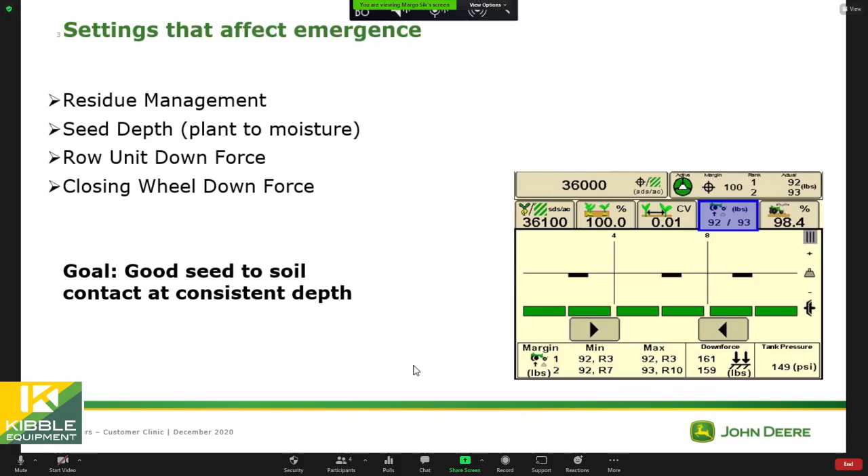But when you're doing all these other upgrades, it's kind of like when you're remodeling a kitchen, right? You don't just do one thing. So we're going to talk about these options today and these settings, what we can do in the field to adjust for the best possible outcome. You may or may not have all the options that we go through today, but there's something on your planter that does affect it, right? So with that, we're going to get started.

Before I move to the simulator, I just wanted to take a quick review of downforce, because every year we get lots of phone calls and questions on downforce. How much do I use? How do I adjust it? We're looking at some options here on the screen that are late model equipment. What we're calling out here is if you've got features like row cleaners or closing wheels, whether they're the easy adjust row cleaner or a manual adjust row cleaner or closing wheel, get your depth determined and those set up before we start dialing in a bunch of downforce adjustments, because one will affect the other.

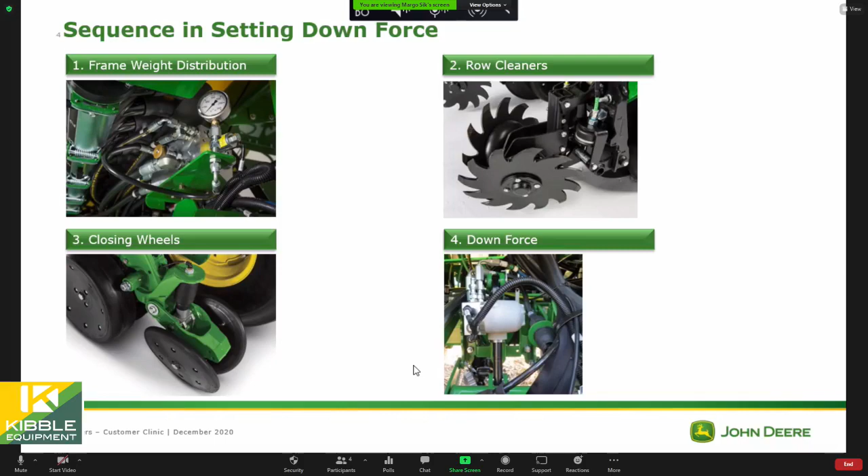And this is just a sequence of how we want to make sure things are set up. So if you do have the frame weight distribution feature, get that dialed into where we want to start. Get your row cleaner set where you think it's going to need to be, your closing wheel set where you think you're going to need to go. And then we always start with a little bit of downforce in the system, and then we adjust from that when we go to the field.

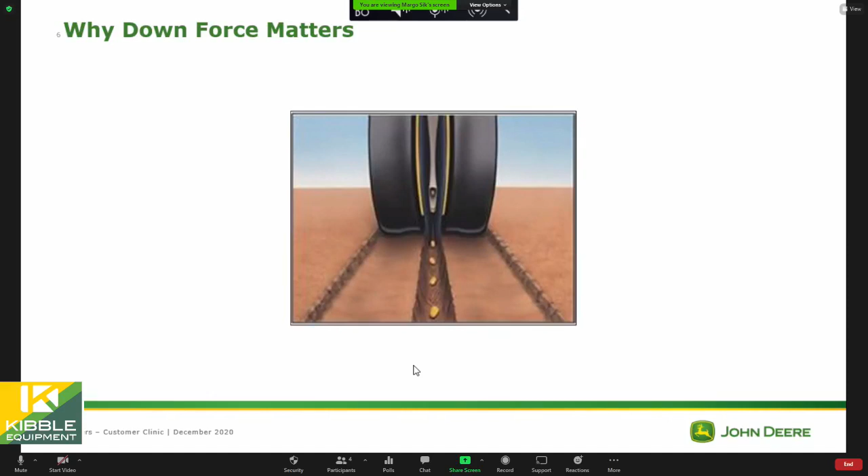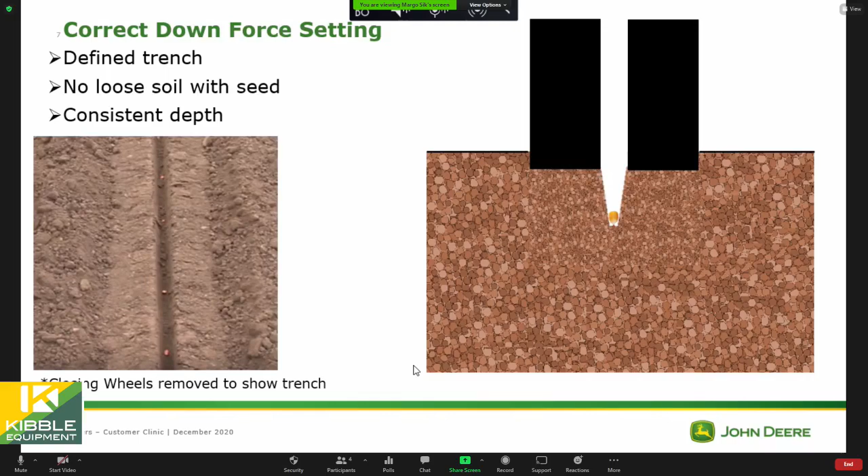So when we go to the field and we talk about downforce, we've talked about why it matters. We're talking about making sure we have a defined seed trench that allows us to drop that seed straight to the bottom, so there are no inconsistencies with depth, right? Something that's too loose could cause issues with placement and depth. So this is a good seed trench example.

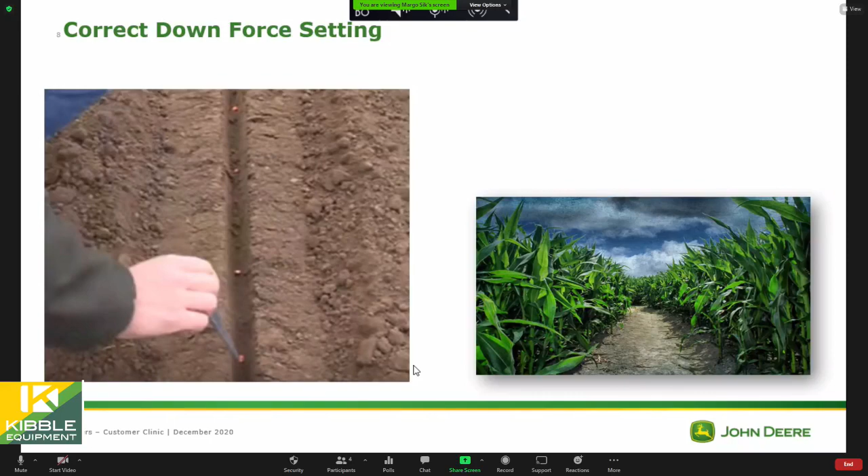The closing wheels are obviously tied up in this picture, and you can visualize your spacing when you're doing a field check, and each seed is at the bottom of the trench. And, of course, if we don't have enough downforce and that is not set appropriately, we get caving of sidewalls, and you can get this situation here where we have seeds that are not going to emerge at the same time.

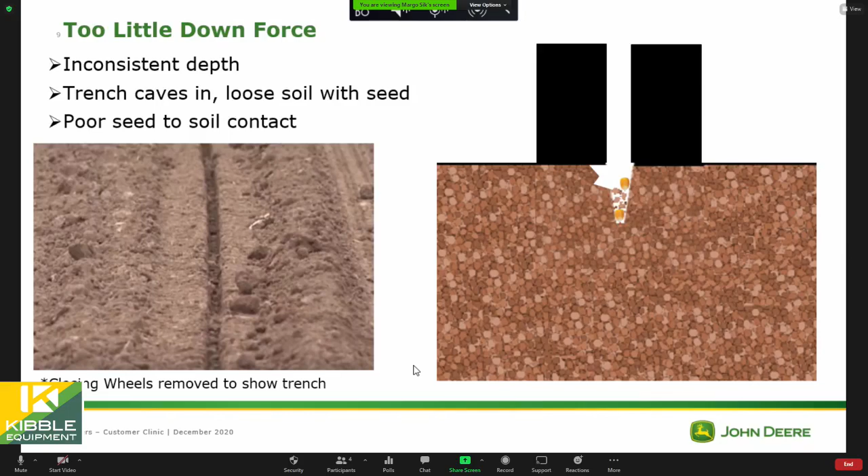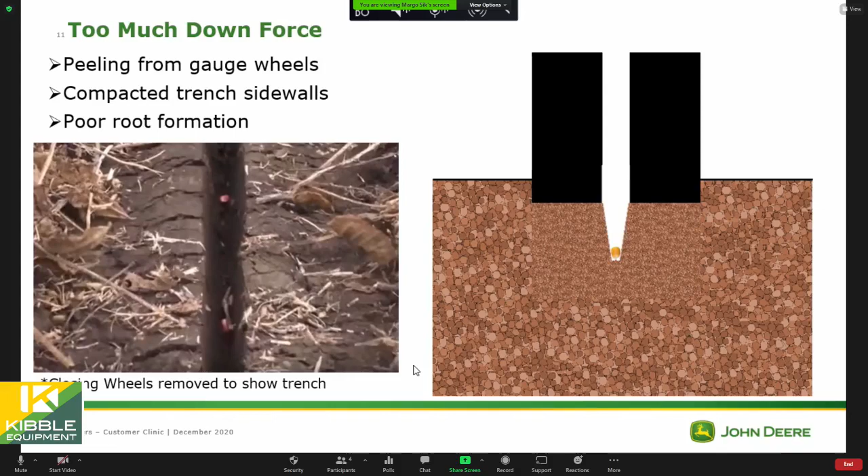And of course, the opposite would be too much downforce. When we start putting too much down and we start having compaction of those sidewalls, we're going to have poor plant health, poor root formation in those early stages, which may affect it later on as well. So just wanted to get ourselves dialed in on what too much or too little looks like.

So when we're watching our monitor and making adjustments in the cab, we're moving things the right direction. So adjustments in the cab. And we discussed downforce, and we have sensors on our row units. When you move into an IRHD, individual row hydraulic downforce system, there is actually a downforce sensor on every row, on every gauge wheel stop.

If you're using active pneumatic, so you're using the airbags that are adjusting, you have maybe 5 sensors across your machine, and it's looking at those and it's making adjustments on the go for downforce for the whole planter frame. But the rules are all kind of the same. That sensor is actually measuring what we call margin. Okay, and we get a lot of questions. Well, what does this number need to be, and what does it really mean?

So when you think of downforce, that's the pressure that we're putting on with either the hydraulic downforce system or the airbag system, or heavy duty springs do the same thing. They apply downforce. Okay, of course you have the weight of the row unit. So together, those may be applying 300 pounds of force. Okay. Now there's force being pushed, as you lay a row unit down on the ground and you pull it through the field, there's resistance from the ground and the soil, right?

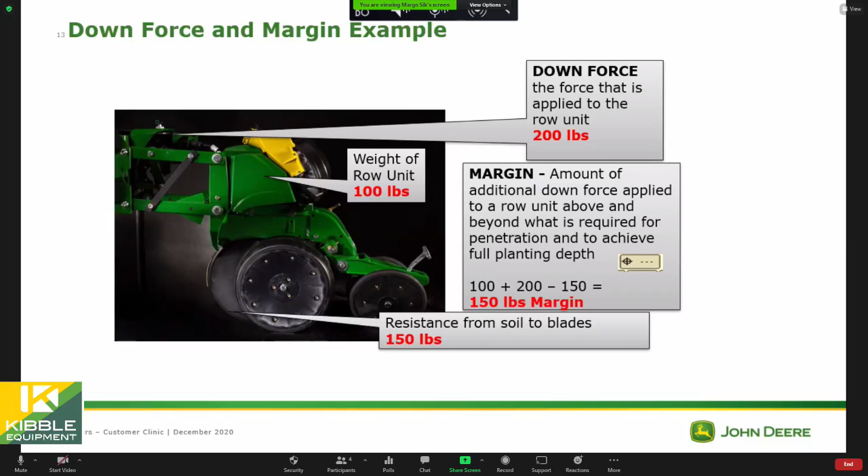So there's 2 modes, whether you're using individual row hydraulic downforce or active pneumatic. There's a set point mode and an active mode. And it's very important to know when you're in which one. And we'll talk about that when we get to the simulator. But in set point mode, you are not active. You are not moving on the go. You've told the system, I just need 200 pounds of downforce. I know that gets the job done and I just want to keep it there. It's not reacting to field conditions.

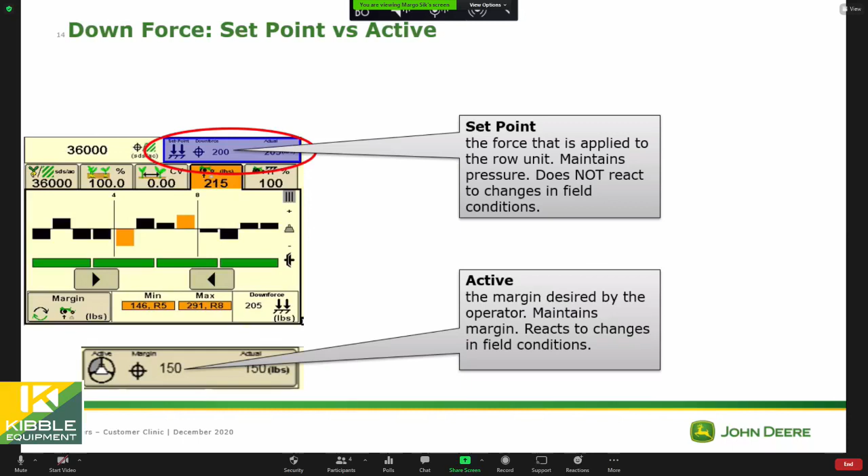In active mode, it should be taking that margin reading and actively changing the pounds of force needed to maintain that margin when we're operating in the field. So just wanted to get through these slides and kind of review that before I jumped over to the simulator. So with that, I am going to, pretty sure, oh, I lied. I have one thing I can't show you in the simulator. So we're going to talk a little bit about unfolding planters.

If you've got a newer SeedStar 4 planter, something that you've had delivered on the farm in the last probably 3 to 4 years, we no longer ship these planters with a frame control box. They are all controlled for fold and unfold through the monitor. There's an app inside the SeedStar app that allows for frame control. So you're either in transport mode for folding and unfolding, just like you had the switch on your frame control box, or you are going to be in plant mode when you want to raise, lower, and plant and activate your markers. So that's what we're looking at here, the toggle between transport and planting mode.

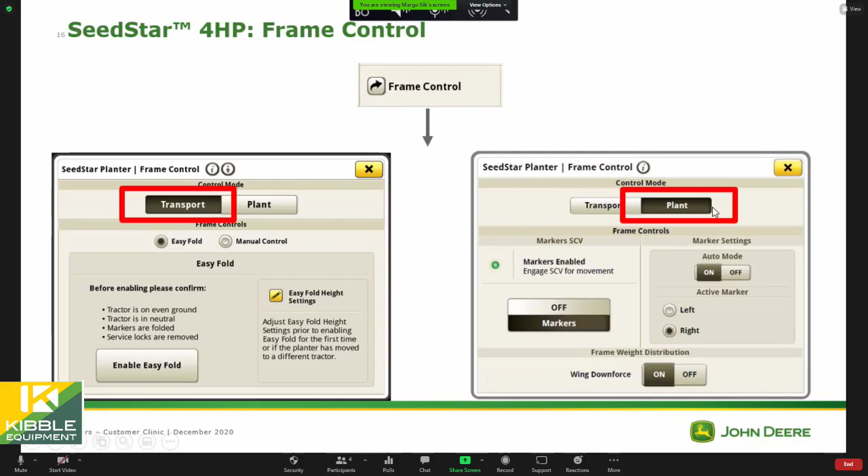And then, of course, if you have this feature, we have something called Easy Fold. So you can toggle to transport mode and unfold your planter manually. So this basically becomes your switch box on the screen. You press what you want to do first. If you're folding, you might want to raise up your hitch for your folding height, and then bring your wings in, those sort of things. Or Easy Fold pretty much automates the whole process with one SCV press.

So to set that up, you have to go inside these Easy Fold settings and first calibrate your hitch position for a 1775 planter. And that's basically where it's going to be for all the way up for transport, where you want to have the hitch position for planting. And then usually for folding, we put it somewhere in the middle where you know that the latches on the wings will clear the hitch.

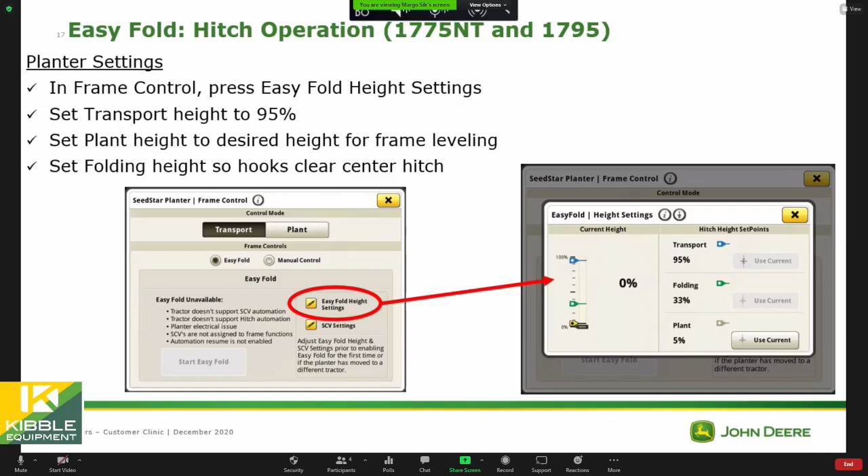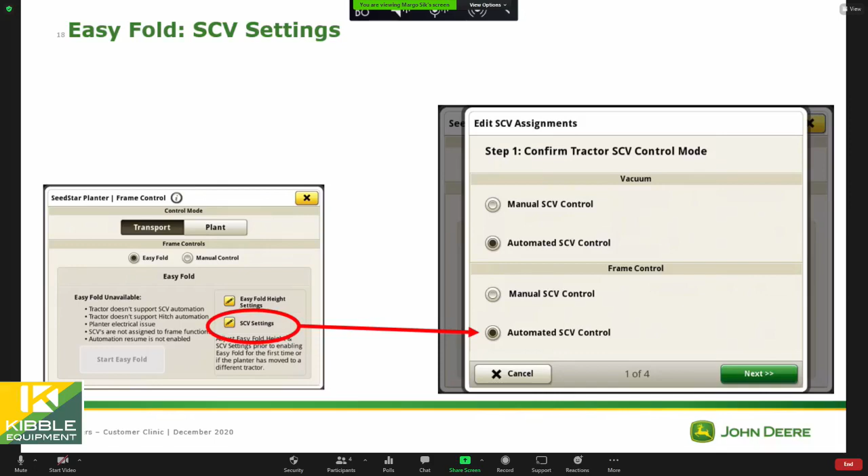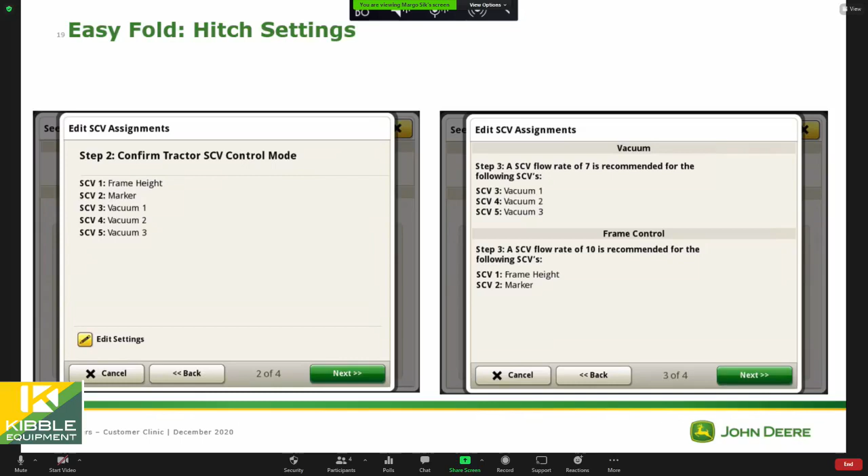And then we also need to go inside the SCV settings on this screen and automate it, toggle the automated option there, and then tell the tractor how the machine is plumbed for your frame and your markers, as well as the vacuums. So these SCV assignments also will affect a feature called vacuum automation for us. And we'll talk about that here in a couple more slides.

So anyway, now that we got it all set up, which our shops will be setting this up before they deliver them to you, but wanted to review that just in case you got a different tractor and needed to set that up. But once we are ready to unfold, in the easy fold option here, if everything is enabled, we should be able to hit enable easy fold. So it gives you even a checklist of what you have to do to fold or unfold.

We also note that to enable the whole system, kind of like with AutoTrack, you have to hit your resume switch for your AutoTrack to enable the whole process. So once that is enabled, we should be green, good to go, and hit this enable easy fold option and then activate your SCV. SCV1 is your automatic SCV in this example, and you just hold that until it folds or unfolds, and it will do all the things it needs to do, whether it's raise, lower wing wheel, bring in wings, or lower a hitch down. It'll do it in the right sequence and order of things.

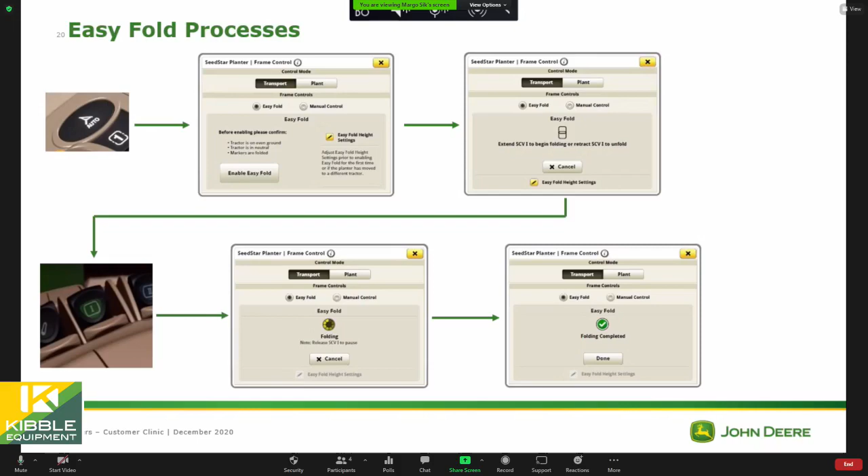As it's folding or unfolding, you'll get the little spinning circle, and when it's done, it'll show you that it's complete. So it really has automated that and made it nice and simple and easy for us. Yeah, but do not go to detent, right? Yeah, so that leads me to my next slide. If you click it into detent, this message over here says it's paused.

So when we're operating easy fold in this auto mode, you just hold either the extend or the retract, whichever way you're going, in that position to activate the easy fold, for lack of better words. And then if you let go, it'll pause. If you push it into detent, it will pause, and you'll have to bring it back to neutral and then reactivate it.

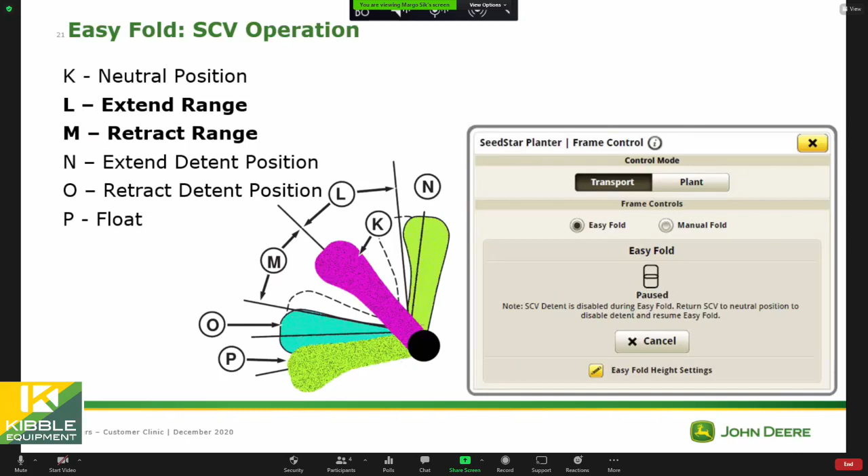Talked about vacuum automation briefly. So this is a SeedStar 3 screen, but the concept is the same. So when you're assigning the SCVs, we also assigned what SCVs were plumbed to the vacuum. And during that process, instead of worrying about how much flow I need to put on each of my hydraulic valves to take care of each of these hydraulic vacuum motors on the fans, I can just say, hey, I know for my seed size today that I need to have a target. In this example, we have a target of 11 inches of water for vacuum. Then it will determine how much flow it needs to do that.

So if it's a little bit more in the morning because it's cold and the oil's a little colder, or if it's a little warmer in the afternoon, it will adjust accordingly and just maintain that target vacuum pressure that we're after. So a really nice feature of moving into an electric drive planter with that vacuum automation. That's something available on both 5Es and ExactEmerges.

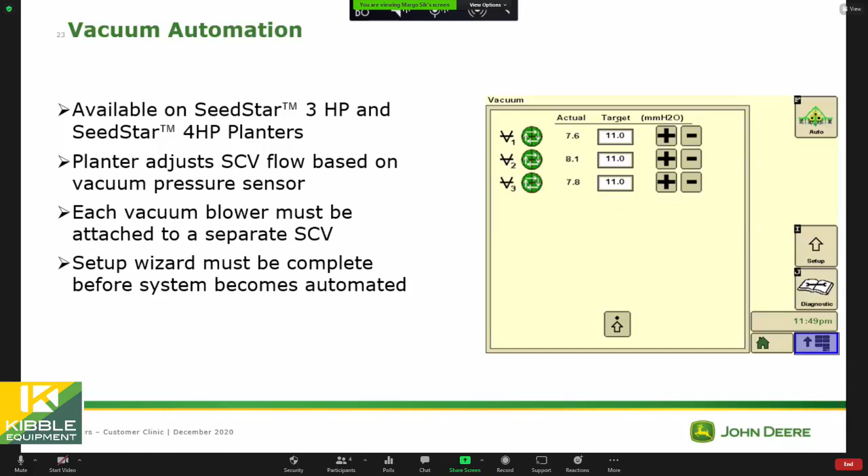So that leads me to setup. I've got a little checklist here. I kind of stole it from our Equipment Plus app. The same checklist is in there. We'll talk about the app at the end of our session today. But when you get yourself to the field, what's the order of things to make this thing happen, right? So you'll use transport to fold and unfold. And then you'll have to switch to plant mode so you can raise, lower, and operate your markers.

And then with electric planters, we have to engage our PTO power generation by turning on the PTO. And then there'll be a button on our screen to turn on the EPG. That's our electric power generation, actually on the planter side of things. So that engages everything from a power perspective. Then we'll make sure our hydraulics are enabled and turned on to continuous detent for all of our vacuum fans. And then we'll lower our planter, because when we lower our planter, we have that on detent, continuous flow on the lower side to operate our CCS fan.

So we've filled up our CCS tanks with seed. We're ready to go. We incorporated our talc while we were filling. Now we're ready to prime the mini hoppers down on the row unit. So lowering that planter will pressurize that tank, push that seed down to those mini hoppers, get those full. Now that they're full, I'm going to ask you then to raise the planter back up.

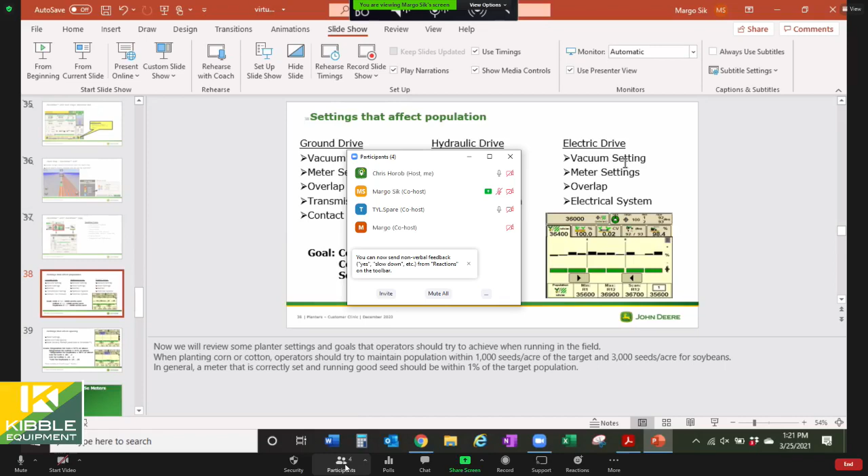Perfect. Okay, so now I've jumped over to my screen with our simulator on it, and now we're looking at a SeedStar 4 monitor and a command arm for a tractor. We're going to basically walk through that checklist now on the monitor, like we're in the cab getting ready to plant, because I want to make this planter plant so we can look at this monitor work and walk through everything we can do from the cab when it comes to monitoring our planting operation.

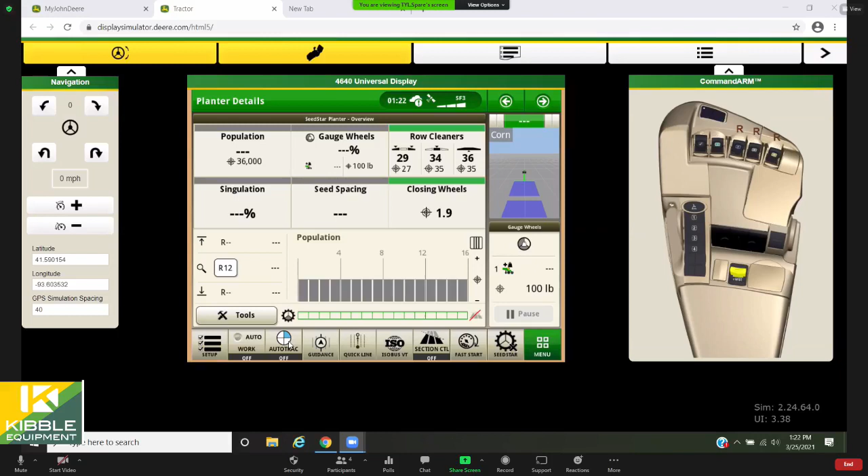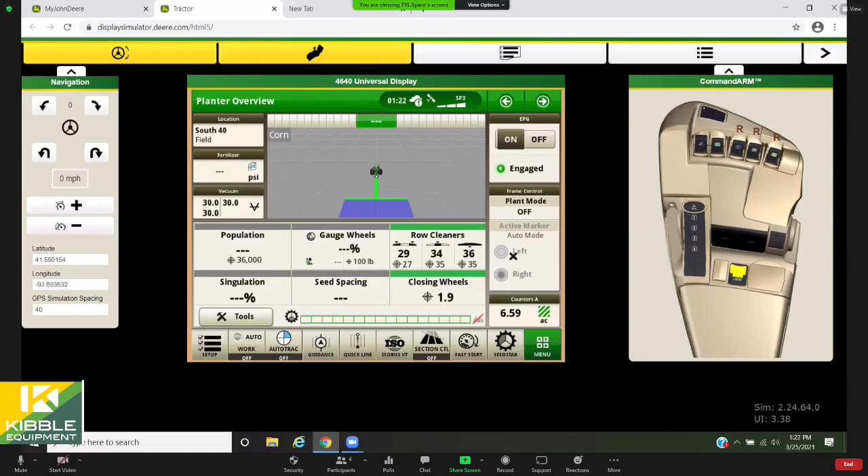All right, so with that being said, I'm going to navigate to the planter overview screen, and I've unfolded the planter. I actually have my hydraulics engaged for my vacuum motors here. I am going to turn on my PTO, then turn on my EPG, and I've got my planter currently in the raise position.

And if I hit that SeedStar hotkey on my shortcut bar, this is where I find that meter brush fill button. So I can hit this fill button and that will rotate the meters while the planter is raised until I press that a couple times until you see the system is all primed up.

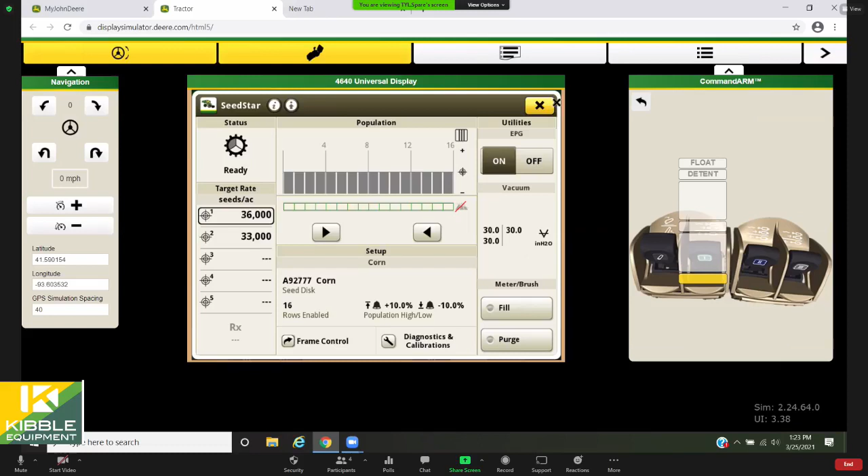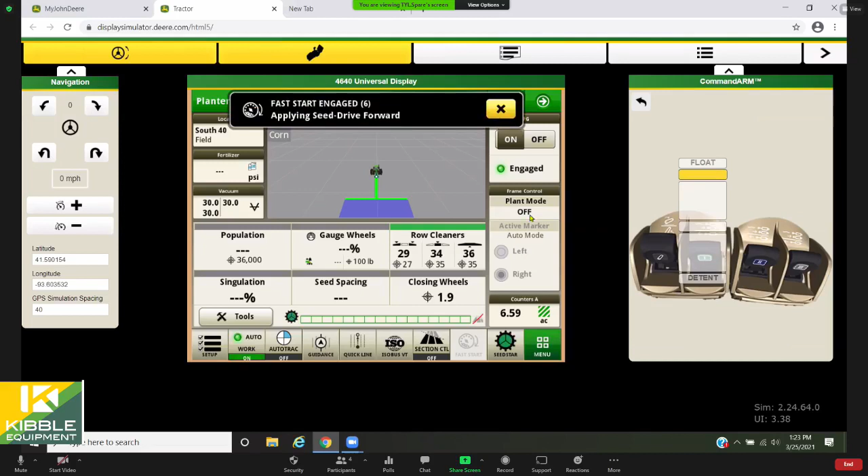But now I'm going to go ahead and lower the planter down to planting position, and I have vacuum pressure here, you see. Then I'm going to ask my tractor to drive forward. My planter has been sitting for a few minutes here, so we'll get her going.

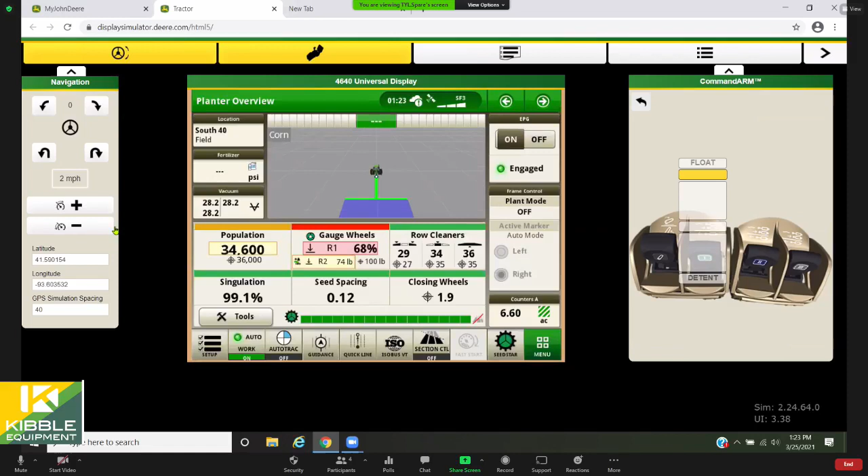So now I'm planting, indicated by the coverage map here, and of course I'm getting some monitors down below on this overview screen. Any monitor that's in the green usually means it's really close to target. Any monitor highlighted in orange would be a little away from that target. And then if it's red, it needs attention, right? We need to make an adjustment, take a look at something.

So this is the overview screen. This is a nice page to look at, kind of just driving through the field, because you do get that coverage map, and you've got the basics of the planter down below.

But if you really want to dive into the details, I'm going to page over to my planter details screen, and this gives me more of a full picture of the planter. And of course I got my layout laid out over here, so I can still see my coverage map and upcoming boundaries or flags, those sort of things in the field.

We have several monitors inside one, right? We've got population, singulation, spacing, we have downforce monitoring. And then of course, if you take the option on your planter for the row cleaners with the easy adjust row cleaners or the pneumatic closing wheels, you'll have those controls up here too.

So no matter what we press up here on the top, you're always going to have your population monitor at the bottom. Nothing's changed here. Your center line is designated as your target. Bars above or below the line mean you're either seeding slightly higher or slightly lower than target.

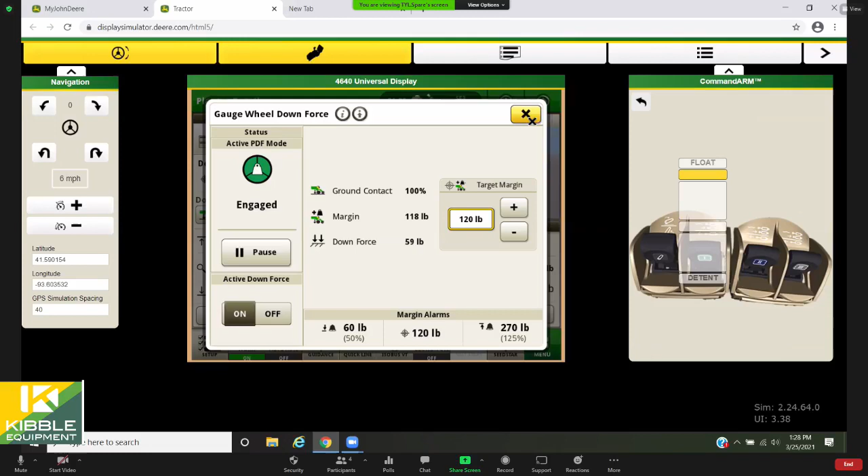And we are in active mode, so we talked about set point active, that's on. Just give it a little bit more margin - we think we need more, so it might make this change in 20-pound increments, which is the default here. Increase that margin, go ahead and plant another little ways and give the system time to react.

And do another field check. So in general, if your seed trench is loose and not adequate, use a little bit more margin until you get there. If you have way too much, use a little bit less. And of course, as you see here, I made a little bit of a change, so it's using more downforce now to achieve that margin, which makes sense.

What we're looking at up here: target, actual margin, and then what rows are high, what rows are low. And of course, because it's individual row downforce, these guys are all kind of interacting independently. You could also, if you wanted to watch a specific row inside any of these monitors, zoom into the details - if I just want to watch these four rows a little bit closer, maybe the ones in the center of the planter, or closer to wheel tracks, whatever it may be.

Or if you want to dial into a specific row, you can click on just row 6 and see what's happening with all aspects of row 6 - population, spacing, singulation, all of the above, downforce.

Anytime you dive all the way down into an individual row, you can get back to the overview by hitting the tab at the top, and that brings you back to the overview, the planter-at-a-glance screen, as we'd call it. So that is kind of the ins and outs of the downforce.

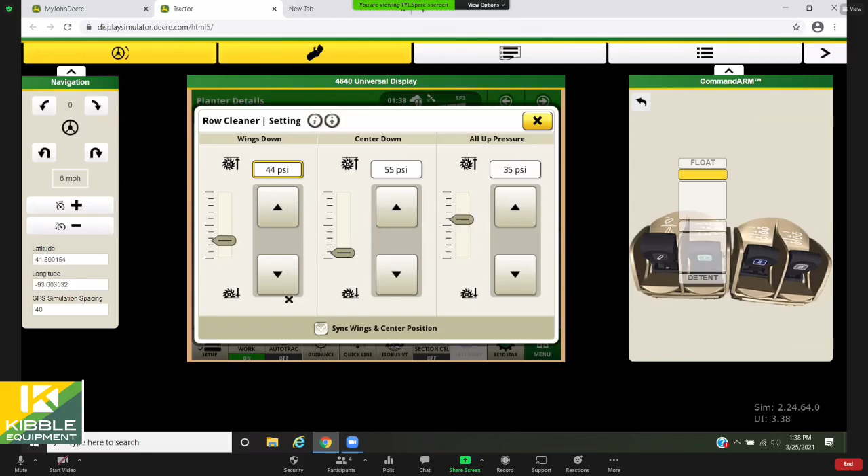But just a reminder that number 3 setting, row cleaners are not supposed to be a primary tillage tool, right, Margot? That's right. So maybe we might want to talk about that, right?

So when we field start you guys, when you buy a new planter or when you're out taking a look at it, row cleaners have an important responsibility, and it's the last chance for residue management. Row cleaners affect emergence by making sure we're residue free inside that seed trench, right? Where it's going to allow, you don't want that residue getting hung up in there, allowing a seed to potentially fall on it, trap it. It could affect your depth, right? And its ability for seed to soil contact.

So we want enough row cleaners to make sure we're getting that job done, but we do not need to be plowing in front of our True V opener, because later on, we've seen that happen in conventional till type situations, and later on you get a rain and a lot of dirt moves back over. What you thought planted at one depth might end up, reality might be different later. So once again, great reason to have them adjustable from the cab.

Okay, so with that, I'm going to leave them in the middle, and I am going to move back to my main screen here and go into my closing wheels. So when we're adjusting closing wheels with our current system with the mechanical adjustments, if you remember what they look like, you have a little T handle that you're adjusting, and you've got about 4 notches that you can put it in, and each one just gives you a little bit more pressure. So you have 4 spots on a mechanical closing wheel.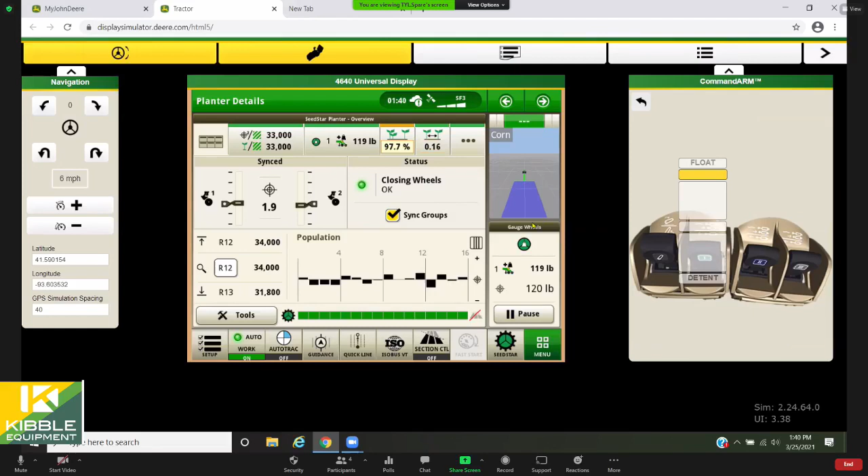This is up to 25 positions that you can adjust with on your pneumatic closing wheels. And if you click into here, your pneumatic closing wheels are once again grouped for the wings versus the center frame, if you so desire. If you think back to that 4-position T-handle on your closing wheel frame, 0 is you've got it off and no tension. Number 1 is that first notch. Number 2 is that second notch. 3 would be equivalent to the third. 4 is the fourth. And then you get a little bit more with the pneumatic closing wheels with the 5th notch here. That's like an additional 75 pounds that you can't get out of the springs

on a conventional closing wheel. There's some video out there I was watching from John Deere where they have a planter with pneumatic closing wheels, and they put a couple of traditional ones back on to do some side-by-side comparisons, especially as you start driving faster speeds. And they stay much more stable in those situations versus the spring. So that's how those get adjusted.

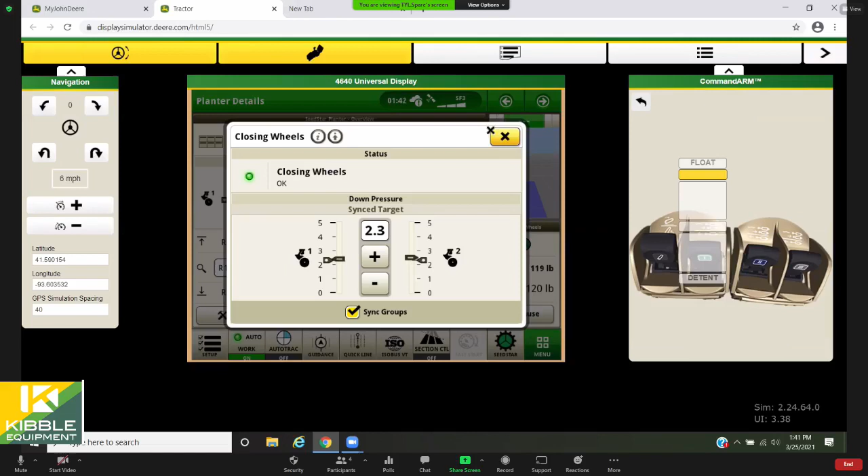You can either slide it up with this, or we can just plus it up and down. And I've got mine synced to make the same adjustment across all my zones, center frame or wings. You can uncheck that if you want something independent. So those are our closing wheel adjustments. And now we're back to the overview on our home screen.

So with that, I'm going to probably pause. Chris, are there any questions? I might move over now into my iPad to go over the Equipment Plus app and how we can use that in the field as a resource.

Okay, this is the iPad. You can also download this app on your iPhone. I'm going to back up here and show you how I got here. This is called the Equipment Plus app. It looks like this button down here. You can go to the John Deere App Store or your App Center to download it. I've configured the planters in here, and you can add as many as you want. Obviously, we have bunches in ours because we're supporting different configurations, but I'm going to dive into this configuration for the 1775, which I configured as an electric drive planter with ExactEmerge, and we're going to use this to get ready to go to the field.

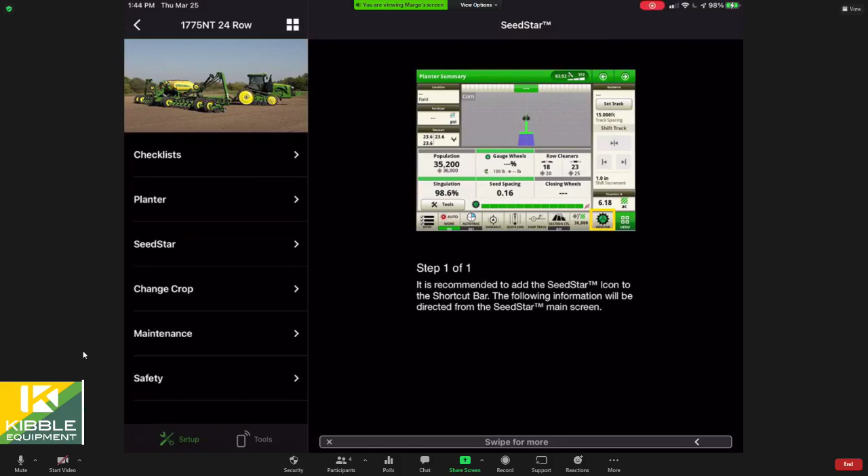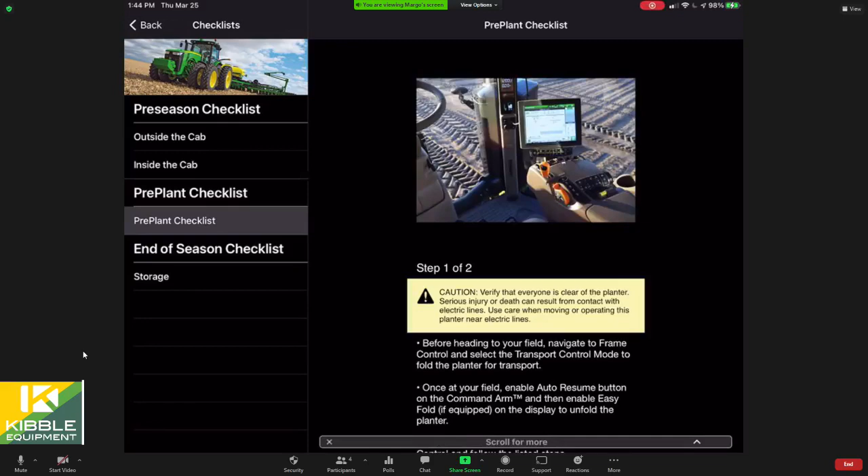Okay, so it's laid out with checklists here on the corner. Remember the startup checklist that I had on a slide? If we dial into this and hit the pre-plant checklist, this pretty much walks us through the things I was talking about, if your memory gets a little foggy like mine. It'll talk about how you can use the resume switch to enable the easy fold, be in transport mode, unfold your planter with easy fold, and switch it back from transport to plant. Now that we're unfolded and in plant mode, you can engage your PTO to get your power generator going, and then click on your EPG.

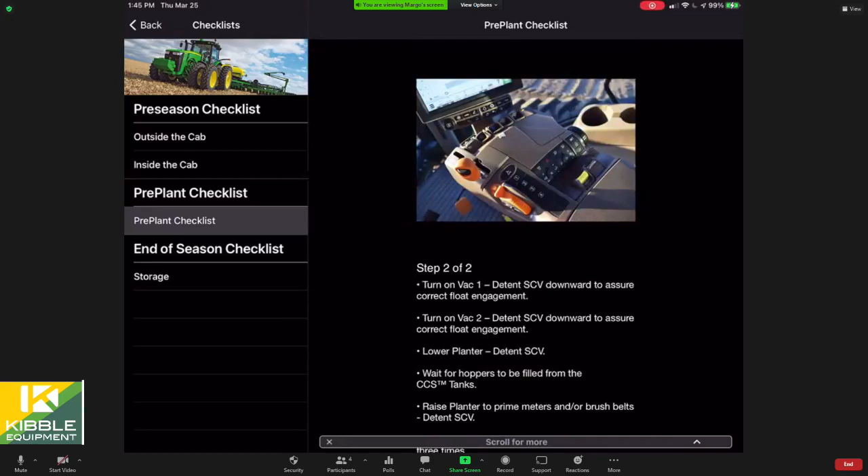This is page 1 of 2. I can swipe over, and then it talks about engaging my vac motors, my hydraulics for those, lowering the planter, waiting for the CCS tanks to prime and fill, raising the planter back up, and then filling your meters and belts. Then lowering your planter back down, and you're ready to plant. So that's a nice tool. It sure does help when you've got all kinds of things on your mind. Inevitably there's a buzzer or a pop-up that comes up, and we missed a step.

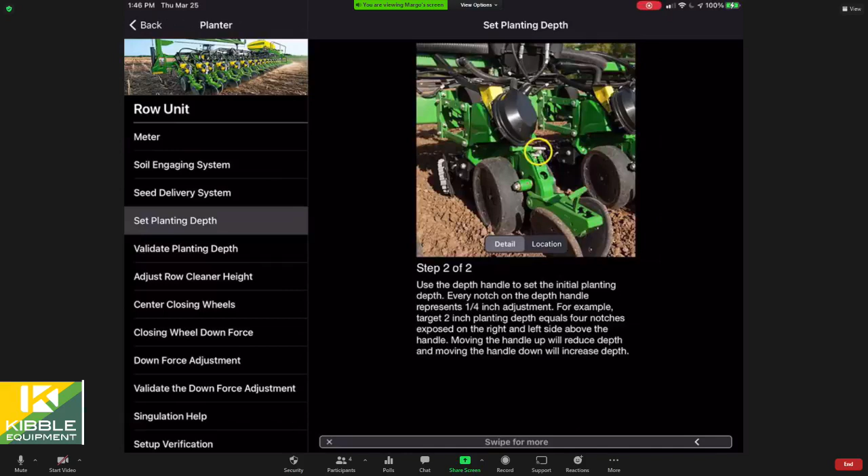So next inside this app, the SeedStar portion goes over a little bit of what we talked about in our presentation today, so a nice little resource as well. But where I want to dial into is the planter checklist here. We referenced this a couple weeks ago from the setup side of things, but now I'm going to talk a little bit more about going to the field. We talked about how we set planting depth last week by adjusting our T handle, but validating it, we have to go plant, right? So lower the machine, get out there, plant, and then verify it's at the appropriate depth.

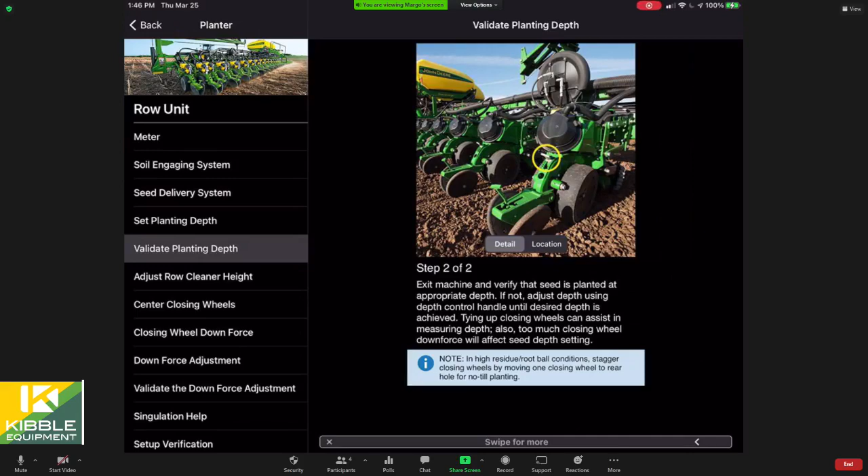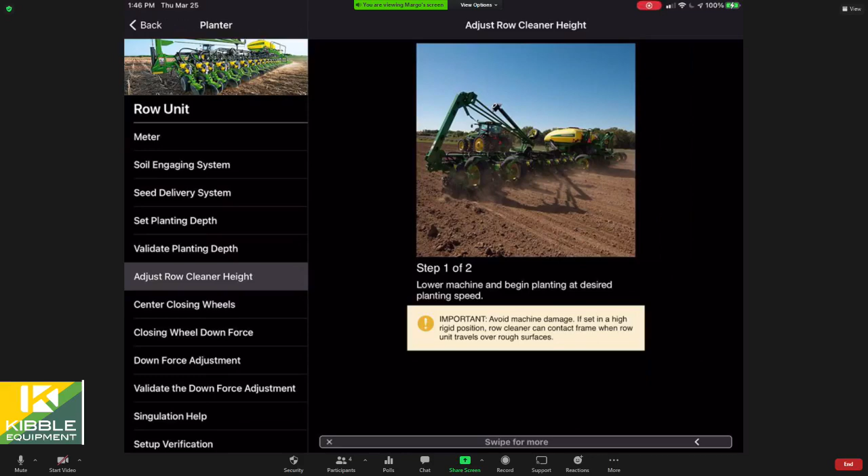Next, adjusting row cleaners. We just talked about that from the cab, but we've got to do that at field start to verify and make that adjustment. Closing wheel downforce, it kind of walks you through that as well.

Hey, Margo, we did get a question about closing wheel downforce. Yeah. So Andy asks, on a high-speed planter, do you need more closing wheel pressure? I'm running one rubber wheel and one spike tooth. So I'm assuming he's got one, every other.

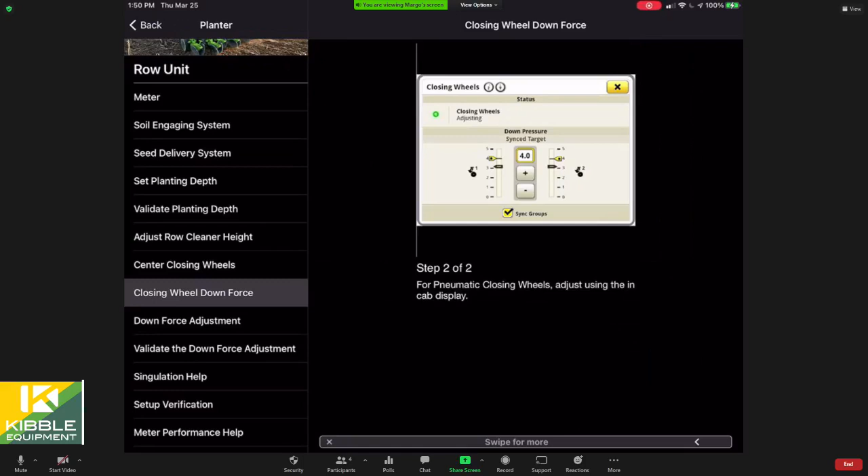So closing wheel downforce, it kind of walks you through observing what you see. Is it closing the seed trench? If you say yes, great. If you say no, it dials us back into adjusting that from your monitor with those pneumatic closing wheels. Downforce adjustment.

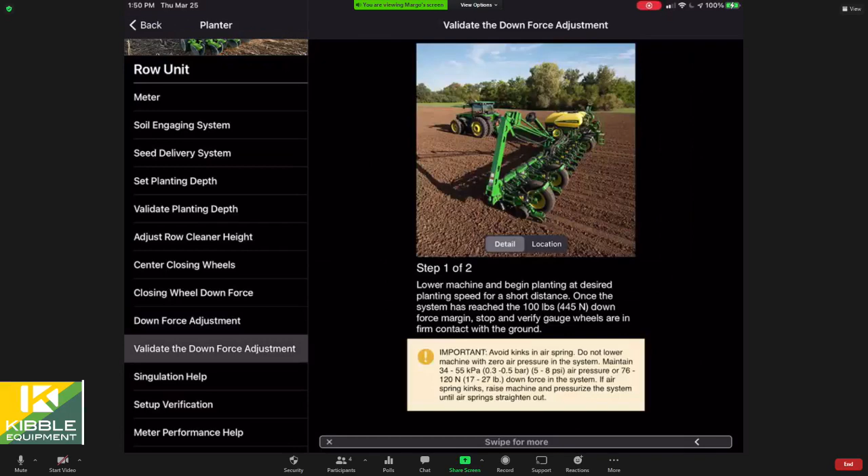Verify. So once again, throughout the app, they'll talk about making sure you're at about 100 pounds for your downforce margin, and then go do your field check and start from there. And that's here under the validation portion. And same rules apply. When you leave the planter down and you get out, do the old gauge wheel kick and make sure it doesn't spin. If it spins over easy by hand, you're going to need a little bit more downforce.

But if you're looking at your seed trench and it's scuffing and just compacting the sidewalls considerably. You've typically got your pocket knife or your seed digger in your hand, and you might be looking at seed depth, and you should be observing that sidewall. I always try to pop my pocket knife into that sidewall and see how much force it takes for me to peel away a part of it. And if it takes a lot, and you've got plenty of moisture, chances are it might be a little too much.

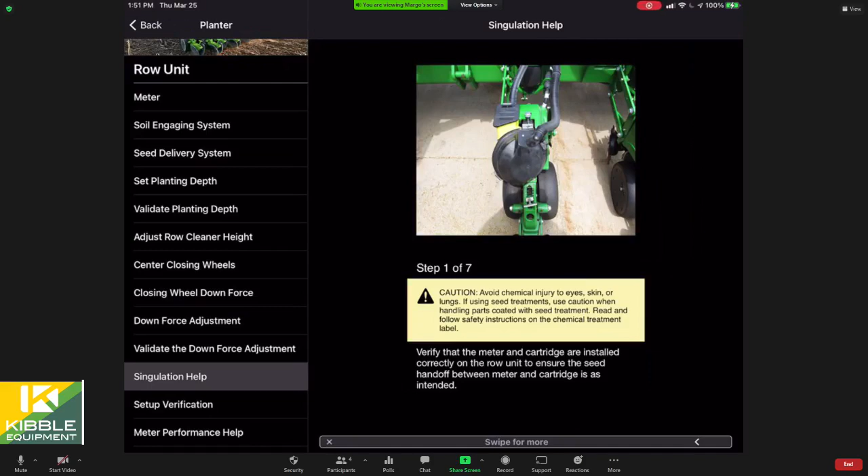So, singulation help in this app. We talked about troubleshooting: if we have singulation problems, it really starts driving us back to the meter. Okay. And taking a look at some simple things too. Are we using enough talc? Those big CCS tanks, those 50 bushel tanks, take 16 cups of talc per 50 bushel. The math is the same as when we put 1 cup in a 3 bushel box.

Of course, this is a talc graphite 80-20 mix, which is now what we recommend with the Promax 4, not the Promax 40s, but the seed bowls and the double eliminator types and things that we're using in our ExactEmerge planters. Making sure that everything is clean and there's no debris building up inside your brush belts. I've heard of things happening here. If you're running fertilizer in furrow, we want all that application behind this brush belt, so we're not gumming up and getting those sort of things happening in here.

Also, double eliminator adjustments. This is the view of that double eliminator. Typically, that third position works for us, but if for some reason it didn't get latched and it fell down, that could happen. Or the condition of the tips, they call those a polytine double eliminator. So maybe they're worn. Might be time for that to be replaced.

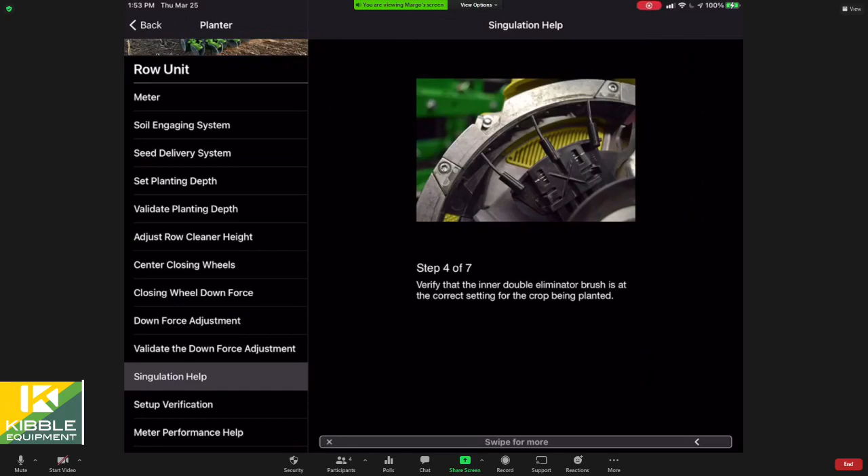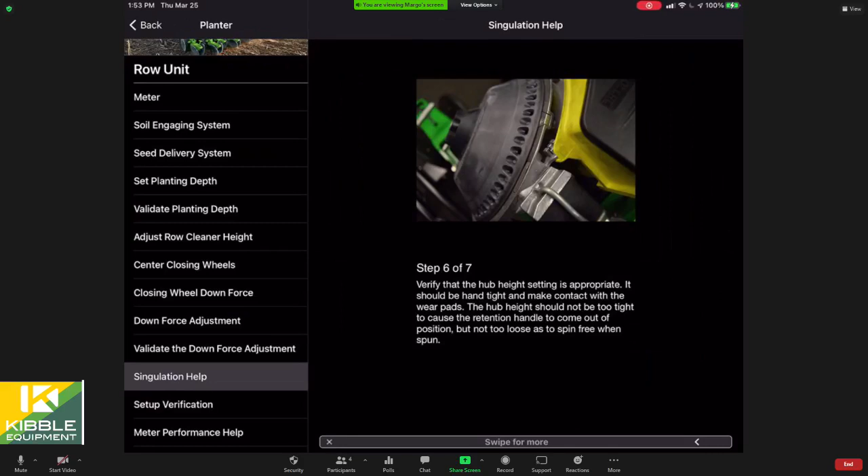Make sure your knockout wheel's in position and it's lining straight up with, this is a really zoomed in view, the holes in the seed bowl. Is that actively knocking that seed out? So these are things we can look at proactively, right? So we're not experiencing that downtime or adjustment time. But typically what happens when we have singulation problems is we just didn't get something slapped back together or latched back together quite right. Hub height was the last thing they talked about, and hub tension, seals, making sure we don't got something pinched there.

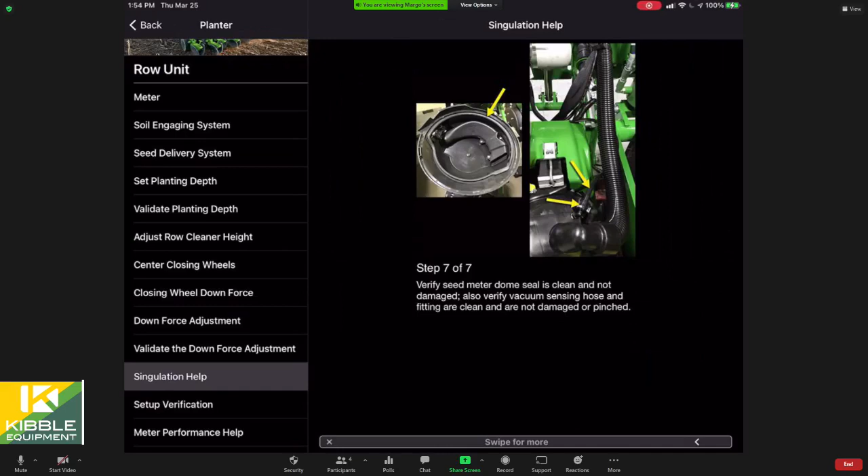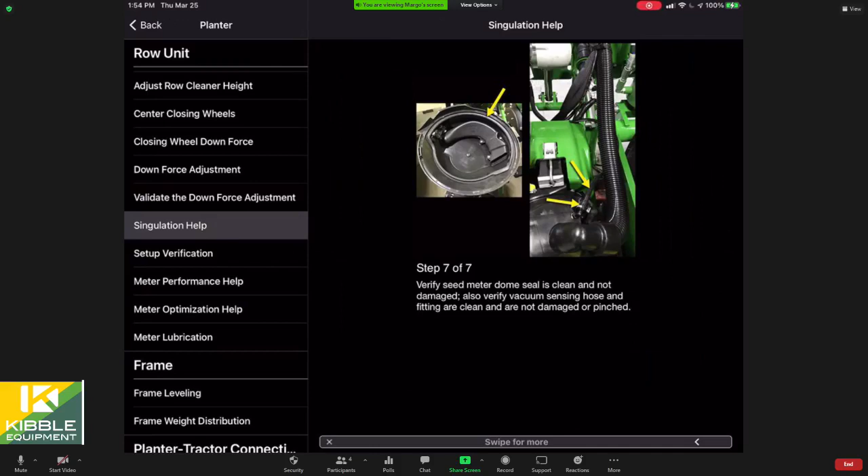So the app does a nice job walking us through those things, as we think about those agronomic factors we started with, right? Population, emergence, the productivity piece of things, it really does walk us through those adjustments to help us get there. So, Chris, is there something I'm missing here in the app that you've explored or found useful? Or you did a great job.

I apologize, I was on mute during the last transition. I was going to comment that a lot of these things you've covered here, don't wait till your corn insurance day to try to do all this. I encourage folks that even if it's April 1st and the soil conditions are fit, to go out and make a few passes just to get some of the gremlins out. Everything you covered today would be good to do even 1 to 2 weeks before you actually intend to plant, even if the soil temperatures aren't adequate. That'll give you enough time that if you need to order parts or get us to come out and do some service, we'll have time to do that.

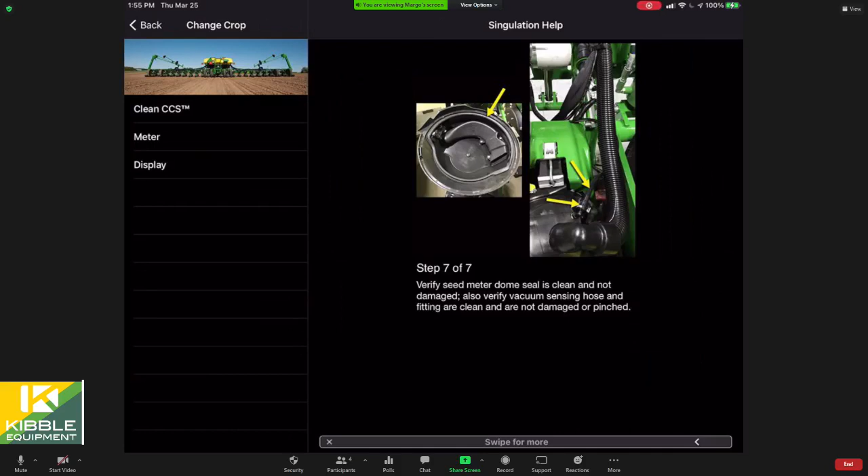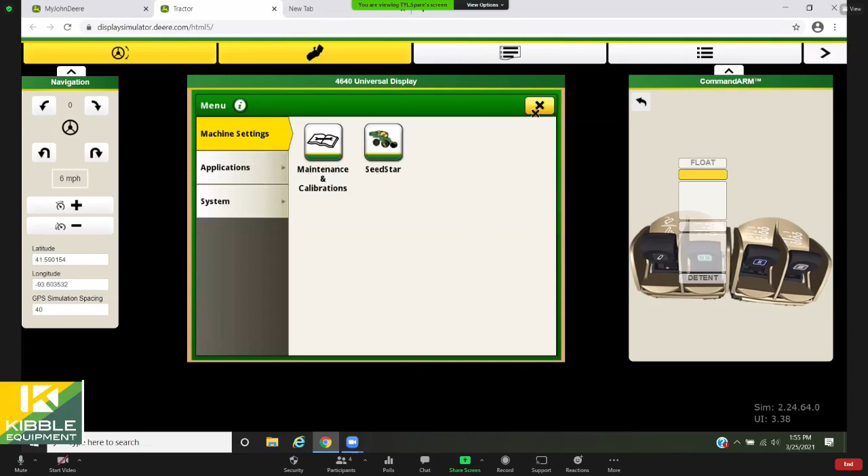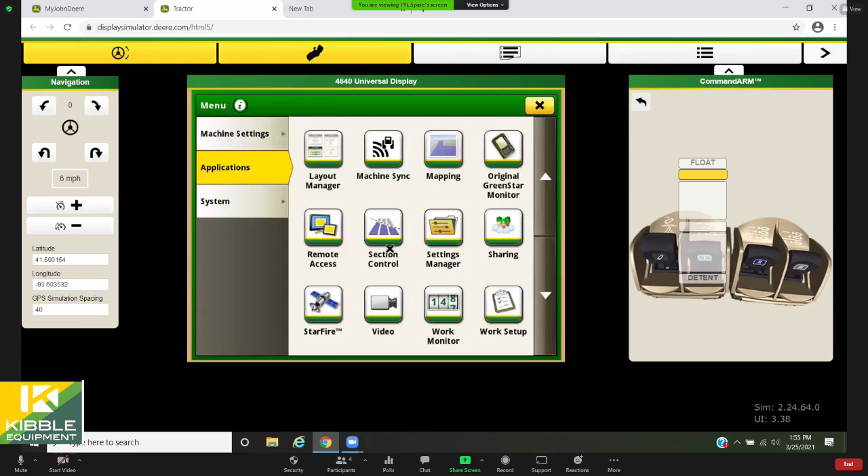Cool. You know what? When you talked about 2 weeks early and finding a dry spot, I really didn't talk much about section control adjustments, and we touched a little on it a couple weeks ago, but I think it would pay to pop back into my simulator. Are you seeing that now on your screen? Yep. All right, we're gonna pop back into that, hit my menu, applications, and go to section control. Just a reminder: if you're going to go scratch some dirt and test everything, great time to get your shut-offs tuned in, for lack of better words.

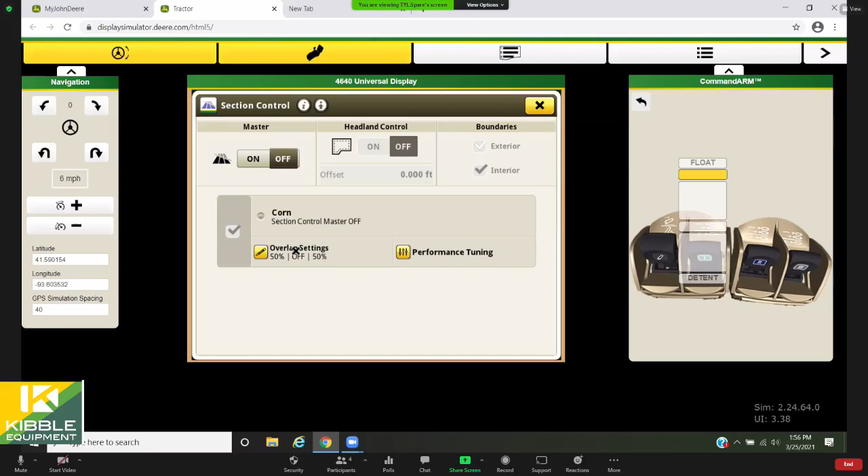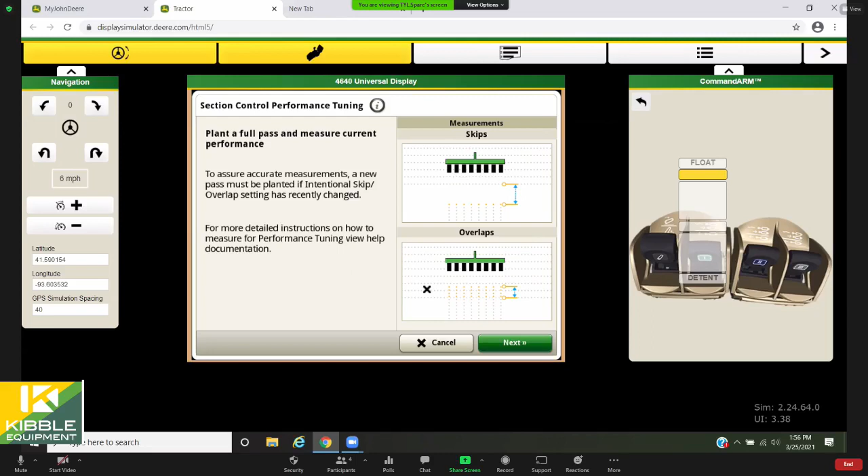We do that under the section control screen on these Gen 4s by navigating to this performance tuning section. Back we talked about overlap settings. Make sure you get that set for what you're desiring to do. Do you want to plant the whole section through to the row, or do you want some intentional skip or overlap? You can set that up over here. Then under performance tuning, make sure we understand what's a skip and what's an overlap, and dial into here. This is where we make those adjustments. I always take a ratchet strap, take the tension off my closing wheels and strap that up, so I have a row I can jump out and visualize real quick instead of digging.

And entering planted area. So this is going into your headland. So this was what we used to call a turn off time. So entering a planted area, you're going into your headland, it's already planted. Okay, what do we see? Do we see a skip? Do we see an overlap? Okay, how big is it?

And then also note, before you jump out of the cab, pick your speed that you're going to come in and out of the headlands with. If it's going to be a flat 5 miles an hour, or if it's going to be 3, you decide. But note that, stay consistent. Get your transmission set up such that you can do that. IVTs are really easy that way. If you've got some sort of power shift, instead of throttling back and being inconsistent, use gear shifts if you can. We've got awesome features in our tractors too, with iTech

integrated control of. Is that what we still call it, Chris? We don't call it iTEC anymore. Yeah, it's tractor. Acronym soup here. Intelligent Total Equipment Control. Yeah, intelligent, total equipment control.